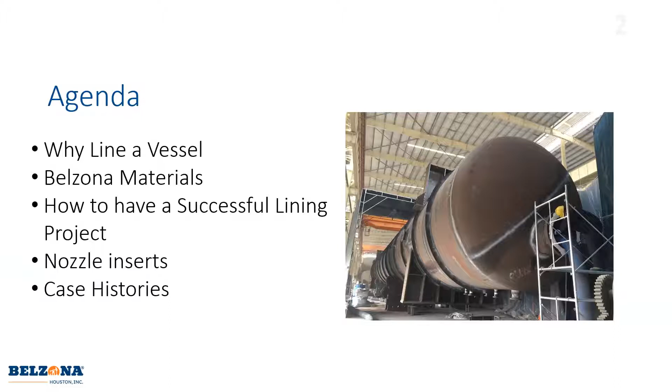Today, we're going to talk about pressure vessels. Mainly, we're going to concern ourselves with internal linings, as you see in this photo, so protecting the vessel from the inside. We're going to talk about why you would even line a vessel, which is a pretty standard practice nowadays. We're going to go into our Belzona materials, talk a lot about how to have a successful lining project, then go into some case histories and some cool stuff like nozzle inserts.

So why even line a vessel? Well, the main thing is you're increasing your reliability. You've significantly reduced the risk for corrosion of the asset, and with that, you've increased your life cycle. So maybe you had to do an inspection every 8 years or a turnaround every 10 years. Well, now you can extend that inspection every 15 years, and extend your turnaround every 20 years.

So you reduce a lot of downtime, and you also reduce the risk of severe corrosion happening and creating an emergency shutdown for repair. So a lot of reduced downtime, and that's huge because I know time is critical. Online time is critical, so you're having a lot of time savings, which is money savings.

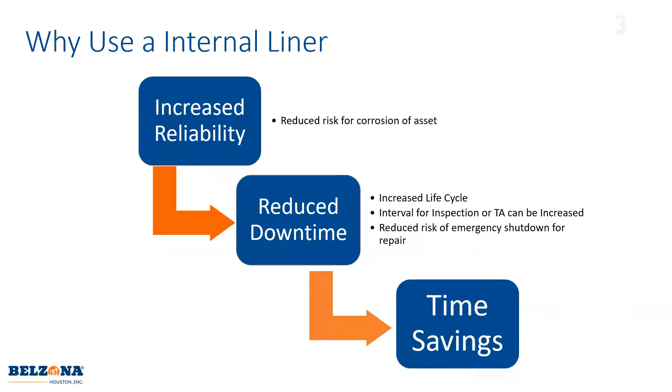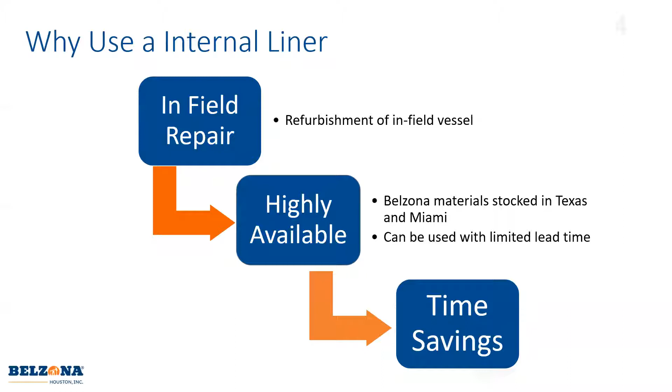As far as that's once you coat a vessel. Let's say you have an infield repair. You have a vessel, you do an inspection, and you realize we need to do some repairs here, we need to protect this vessel to get a longer run. Well, the Belzona materials, we have them stocked here in Alvin, ready to go, highly available. So if you needed to do a repair, out of the blue or during an inspection, we can be there with a very limited lead time and be ready to roll and get a repair as fast as possible, which could give you more time savings, less downtime for the repair.

Another big reason why a lot of asset owners use epoxy coatings or internal liners is they're a huge cost benefit over a typical change to an upgraded metallurgy, like a corrosion resistant alloy cladding. This is an example for one project where they had about 40 vessels and they were trying to decide between a Belzona liner or a corrosion resistant alloy cladding. As you can see in that top row, option 2 was the cladding, option 1 was the Belzona, and the Belzona was about a fourth of the price. So they saved quite $150 million on capital cost. That's a big time savings for a system that's going to give you that corrosion resistant protective layer.

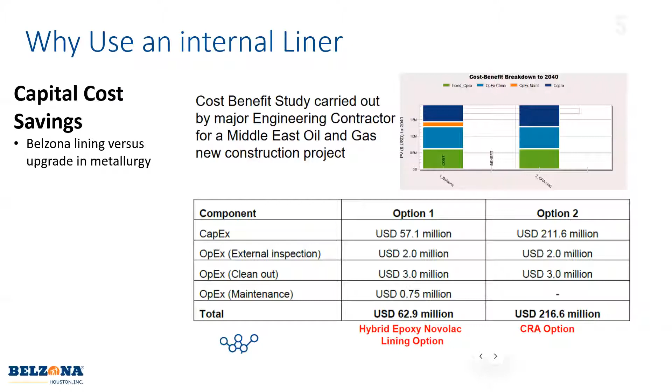So that's one of the big benefits, your capital cost savings. Down the line though, you're also getting simpler fabrication, simple maintenance, and they can still be inspected with an easy inspection strategy. As far as fabrication, a Belzona liner or any internal liner is going to be a lot easier than clad welding with a corrosion-resistant alloy. Also, since you're using a liner, you don't have to upgrade metallurgy to a stainless steel or an alloy. Your fabrication in terms of welding and machining is going to be easier with carbon.

As far as maintenance, if you're looking at an uncoated vessel versus a coated vessel, you're going to have a lot less maintenance over time. You're not going to have that metal loss over time. You're not going to have to stop production and do a quick repair. You're not going to have a through-wall defect over time because of extended corrosion.

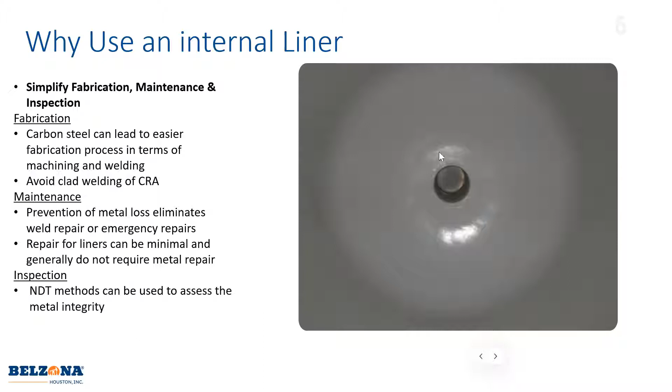This right here is an example of a coated vessel, and this is 5 years after. So what you've effectively done is installed a corrosion allowance system. Instead of adding more metal for your corrosion allowance, you put a liner. This is 5 years after, so you've effectively stopped 5 years of corrosion. Most of our liners, when they're fit for service, you're looking at a 10 to 15 year lifetime, and that doesn't mean after 10 to 15 years it's totally gone. That's just our recommended inspection interval.

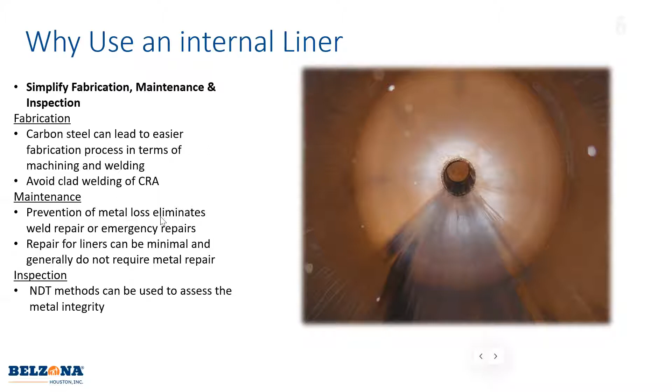As far as inspecting it during the service life, you can easily do a UT from the outside. If your metal is the same thickness as when the coating was installed, that should mean that the coating is protecting the metal and it's not corroding. So that's a good technique for inspecting the coating without actually opening up the vessel and doing a visual inspection.

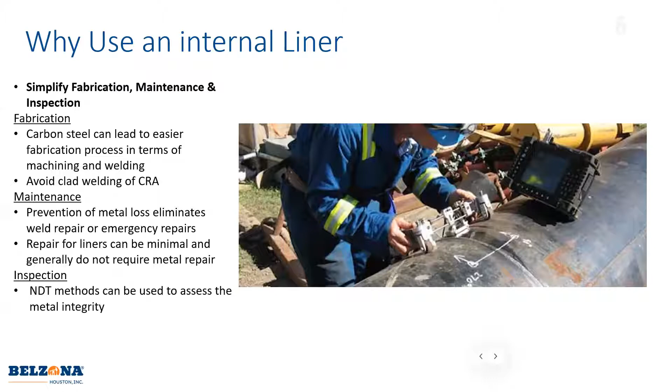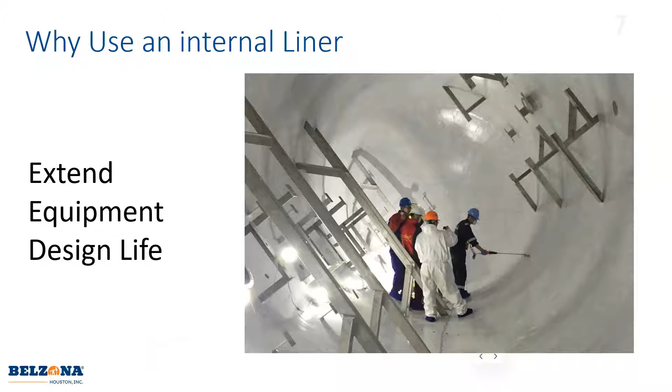And finally, the main thing you're looking at is when you coat a vessel, you're just extending the equipment's life. You're extending the life cycles. Anything you coat, you're just putting a barrier between your asset and the fluid on the inside. So just protecting your asset for a long run.

So going into the Belzona materials, how do we know that our coating is going to be fit for service? Well, when talking to a lot of oil and gas asset owners and petrochemical asset owners and having a conference, these are kind of the most important testing regimes that are out there for internal liners.

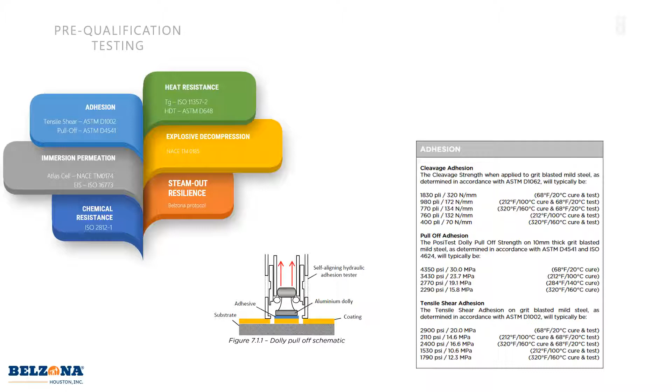So the first thing I'm going to talk about is adhesion. You definitely don't want the coating to delaminate over time, so you need a really strong adhesion. One of the things we do is adhesion testing at different temperatures. We do adhesion testing after chemical testing, after immersion testing. So you really got to know, yes, it has adhesion after it's cured and ambient, but how about at high temperatures? As you can see here, we do adhesion testing at higher temperatures, and you can see there is a fall off.

So you want to always make sure your coating has data in those temperature ranges. So how do you know what kind of temperature ranges they can handle? Well, one of the best tests out there is called the Atlas Cell Cold Wall Immersion Test.

As you can see on the left here, there's two different ways to do it. If you want it to be a little bit pressurized, you can use a flange system where you flange in. You have two flanges. The inside of the flange is coated with your liner, and then they fill up the pressure boundary with water at a certain temperature. The other one is kind of a glass cell. It's not really pressurized, but you can still get a temperature on it.

So then they run this test for about 6 months at a certain temperature that they think the coating should handle, and they test it periodically for delamination, blistering, all types of defects. For it to be suitable for that temperature, it has to go the entire 6 months without any defects. As you can see here, there is a change in color, but there's no cracking, no blisters, no delamination. So that's a pass there.

Once it passes the visual test, they'll actually check the coating for resistance. If it absorbed any water, then the resistance would go down, so it has to pass that test as well. And then they even do an adhesion test after this test, and it has to maintain its adhesion to show that it didn't get any mechanical damage from the heat or from the water.

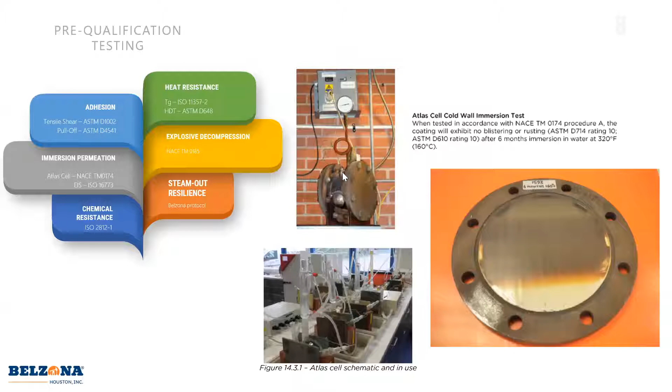Also, the biggest question - all these pressure vessels are going to have some sort of chemicals. Can we handle the chemicals? Well, we do year-long testing. We coat these rods and immerse them into a lot of different chemicals at different temperatures and concentrations. For them to have an excellent rating, they have to have no defects after 1 year.

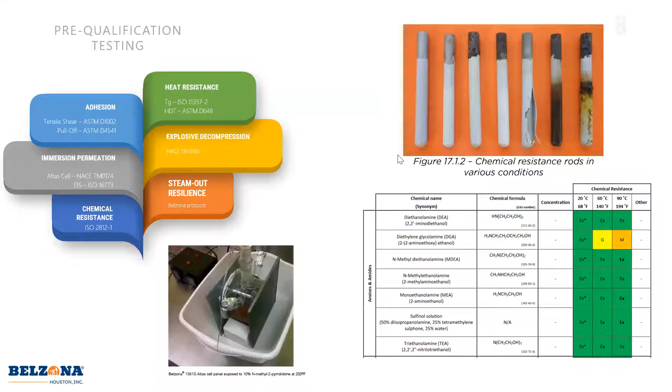Also, you want to make sure that temperature is not going to affect your coating. These are polymers, so when it reaches a certain temperature, you could get some loss in mechanical strength. That's what we call the HDT. Above the HDT, it will lose some mechanical properties such as stiffness and tensile strength. You want to make sure it maintains all that because the mechanical properties add to the adhesion. If it loses some mechanical properties, it will lose some adhesion, so you always want to test that as well.

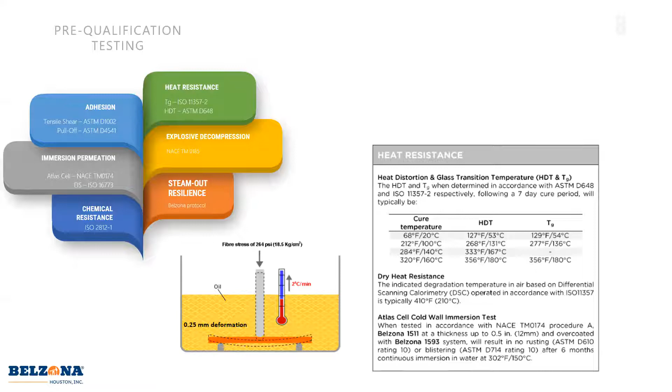And then finally, explosive decompression. This comes into play after your liner has been in service and you want to shut down for an inspection or a turnaround. You're going to depressurize your unit. One issue that could occur is if you depressurize at a certain rate and the coating can't handle it, it could have some issues as far as blistering.

Sometimes gases do permeate the coating, getting a little bit into it, and when they diffuse out, they can cause a blister. So we pressurize our coatings pretty high, to 100 bar and 212 degrees Fahrenheit, and then do a rapid decompression over 15 minutes down to atmospheric pressure, to make sure they don't have any issues.

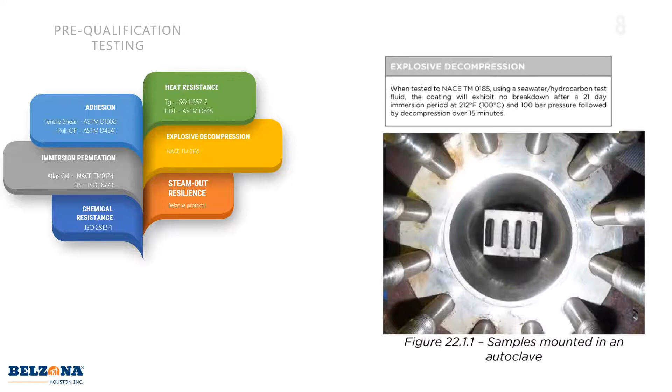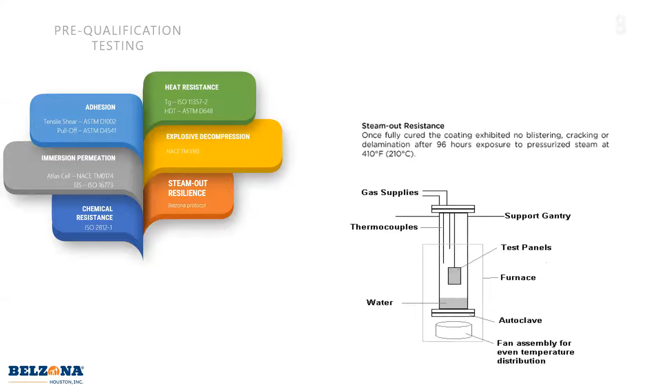We do this with a lot of gases, hydrocarbon gases, and seawater, just to make sure it can handle that. And we know that to inspect a coating after it's been in service, you have to put it through a cleaning and steam out regimen, so we do steam out testing to make sure it can handle that as well. We make sure it's going to handle the service and the cleaning, and then you can put it back in service once it's been inspected.

So now I'm going to go through a coating project. Phase one is typically where we work with our client, figure out what's running through the vessel, what's the temperature, what are the chemicals. We'll look at our testing, figure out what product we need to use, and then put together a specific project specification, an ITP, which is an inspection test plan.

We'll put together the hold points, who's going to inspect it, who's going to install it, are they trained? If not, we can train them. Is it going to be our guys going in there? We'll get all the data together, safety data sheets, CRS sheets, which are chemical resistance sheets, put it all together in a package, schedule it, and get it ready to go.

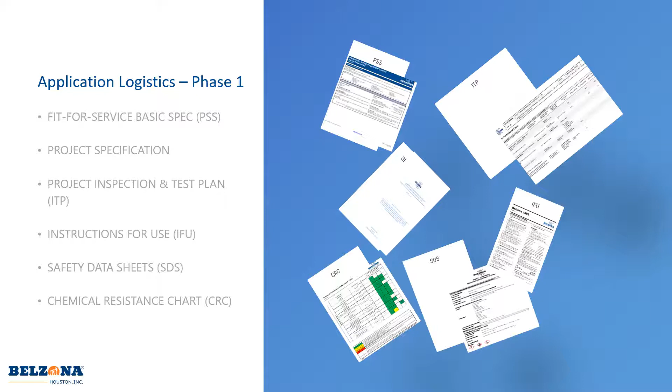Once it's approved, we can move on to phase 2, which is the setup prior to arrival. Scaffolding is a big thing. Sometimes you have vertical vessels and you need scaffolding, sometimes on the outside to access nozzles. So that's the main thing - every project usually needs some scaffolding.

Airflow - obviously we're working in confined spaces, so we need airflow. We need to know what size the manway is, so we know what kind of equipment we can put in there. Nozzles isolated, disconnected, and the vessel decontaminated.

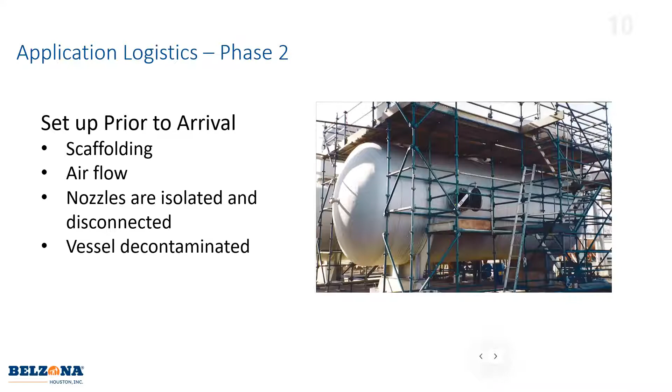Once all that's done, we can start our mobilization phase. A lot of these jobs in the field are done as new construction, so you can do them in a shop, which is a little different, a little easier - you don't have to deal with things like the shutdown process. But in the field, even in the shop, you need a climate control system, a DH and an AC, bringing dry air into your vessel. For all that, you will need a generator.

We need to blast the surfaces to get our profile and surface cleanliness requirements, so we need a compressor, blast pot, hoses, and our blast media. Then of course we need our Belzona materials, our Belzona product. Sometimes we apply this by airless spray, so we'll bring in our spray rig.

So there's a lot to set up. That's usually a day or two to get everything set up, get familiar with our pressure vessel, do an inspection, and get a plan to go ahead, because there are times when that's the first time you've seen the inside of this vessel. A lot of times when you're shutting it down in the field, you don't really have a chance to see it until you start your project.

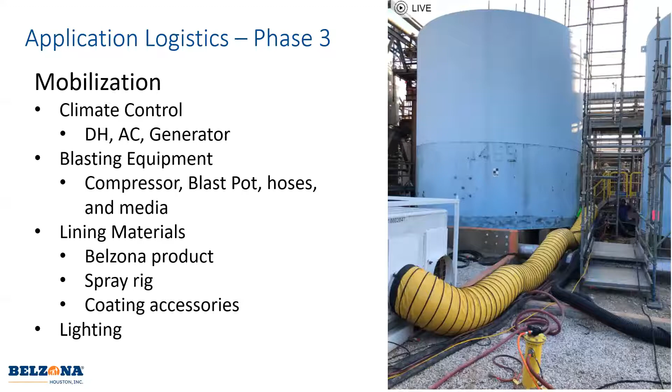So this is where the pre-surface preparation comes in handy. You can go in there, take a look at the vessel. Maybe you found there's more pitting than you thought, maybe there's less pitting than you thought. Look at all the welds, see what needs to be stripe coated, make a plan.

One of the main things of the pre-surface preparation is, even though the vessel's been decontaminated, steamed out, and cleaned out, sometimes you do have some salts within the metal, and one of the big things is you want to check that. That's what this picture shows - checking there's 16 milligrams per meter squared of chlorides. Our limit is 20, so we were good here.

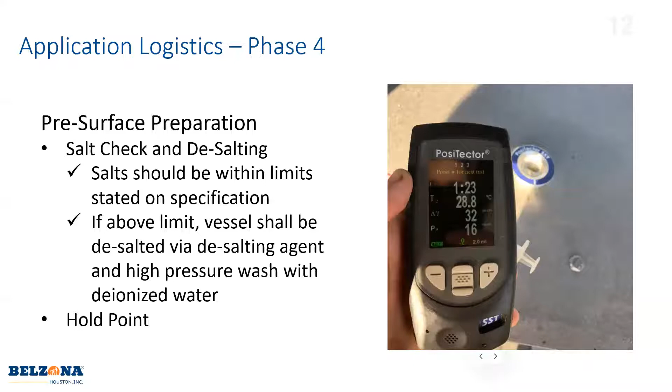You want to make sure you're under the limit, that way you can blast and not have to worry about any flash rust, and also any blistering during the application. If you do apply it with high salts, there is a chance for blistering over time. So if we do find that it's high, we'll desalt it before we start blasting, and that's usually a hold point with the inspector.

So we got our mobilization, we're set up, our vessel's decontaminated and desalted. This is really when the application process starts. This is when everything has to be done boom, boom. You don't want to wait too much in between steps.

So the first step is to get your surface preparation done. Any internal liner, we're going to need a blast to near white metal. That's a clean blast, removal of all rust scale and mill scale, down to bare metal with a 3 mil anchor profile. As you can see here, we're blasting.

This does end up in a lot of blast media being made. So one of the big things is you want to have a vac truck ready once you're done blasting to suck out all this media as quick as possible. Clean your vessel. This does bring a lot of dust out, so you have to do a solvent clean, vacuum. You want this metal to be pristine, just clean, no dust, no media, nobody sweating in there.

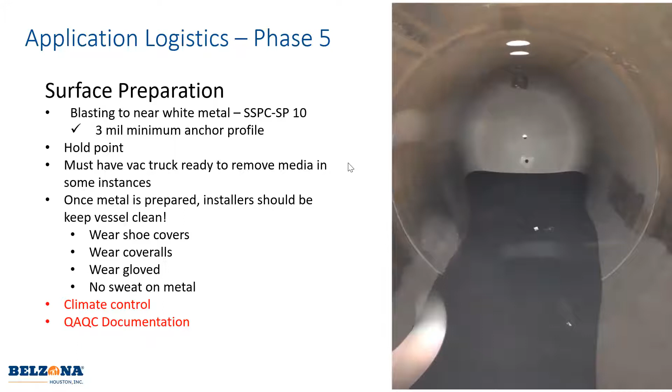So that's one of the big things we tell people is, once it's blasted, you're going to have a clean operation. Everyone's going to wear shoe covers, coveralls. One of the big reasons to have AC too is to keep it cool so people aren't sweating in there, because that could lead to flash rust. So it's really big to have climate control, QA, QC documentation throughout showing that it is climate controlled and you got your profile and you got your cleanliness. This is going to be a hold point after this.

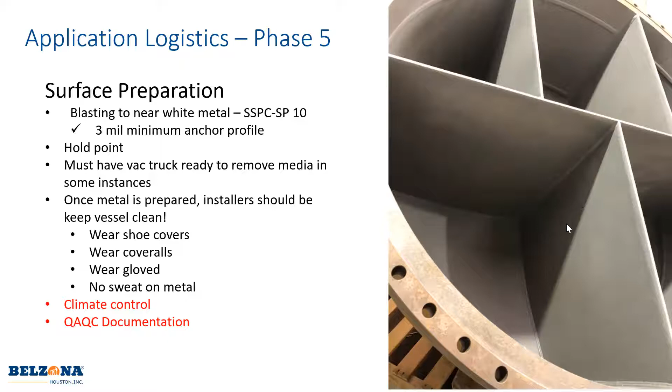So this is what a near white metal blast would look like. Clean metal with a rough anchor profile. That's going to give us our best adhesion.

So once you've done the desalting and the surface preparation, you have it blasted and you have that vessel cleaned out, that's a good level reached there. That's always kind of, now it starts to flow pretty good. No more heavy lifting. Now it's just, let's coat it.

So the first thing you usually do is, if there's any pitting, you're going to pit fill with our rebuild products. There's nozzle inserts and there's stripe coating. Normally those are all done at the same time. You have a 3-man crew, 4-man crew, you kind of attack those all in one day.

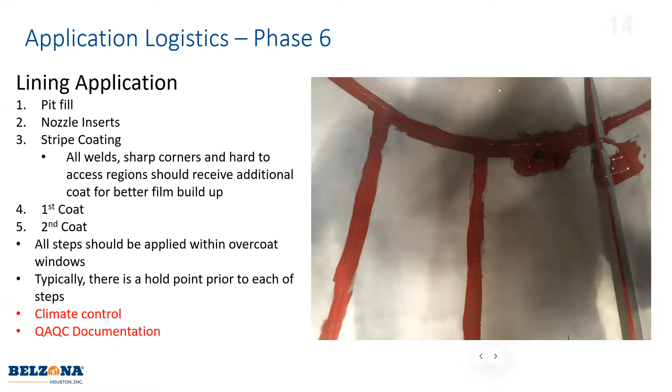So stripe coating is what you're looking at here. That's an additional coat to any hard to reach areas, any welds and sharp corners. Sharp corners and welds tend to need a little bit more film buildup to avoid having pinholes. So those areas would require an extra coat. Pit filling, if you have any pitting, you want to smooth it over with our rebuild paste grade materials. Then any nozzles, there's always a lot of nozzles on the pressure vessels.

Any nozzles 3 inches or below OD, it's really hard to coat those properly. You can stick a blast nozzle in there and coat it as best effort. But the only way to really get 100% coverage guaranteed is with our nozzle insert system.

Nozzles are an area that tend to be the failure points. So this is a system that increases the reliability tremendously.

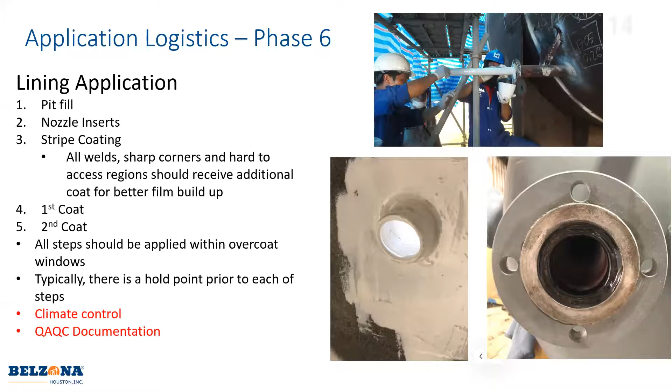So once you've done your pit fill, your nozzle inserts, and your stripe coating, keep in mind that you have a blasted vessel. You want to do this in a timely manner, and get your first coat on as soon as possible, because that freshly blasted surface has a limited time before it would flash rust, especially in the field and especially a vessel that's been in service. So you want to get all this done, and as soon as it's tacked up and ready to go, you want to get your first coat on.

So this would be our first coat. Now, once you put on your first coat, you kind of breathe easier a little bit, just because you've applied your first coat on a nice blasted surface, and you don't have to worry about flash rust at this point or having to do an extra blast.

So this is when you can kind of breathe easy for a second, but you also got to keep in mind that every coating has an overcoat window. So for example, this one has a 24-hour overcoat window.

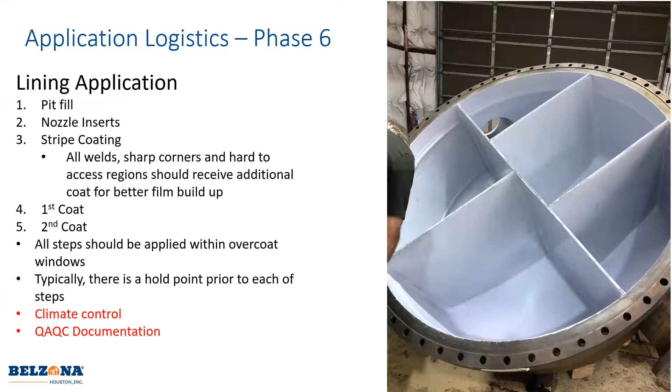So I have 24 hours before I need to put the second coat on, and it takes about 4 to 6 hours to dry. So you really want to time it later in the day, so that the next morning you can come in and get that second coat on. That's what we typically do: get our blast done early, stripe coat, and then later in the day apply our first coat.

And then in the morning, the second coat. So you just got to plan that out, because a lot of times you have to walk on that first coat, so it has to be dry enough for you to walk on, not like this scenario where you don't really have to walk on it.

And so all steps should be applied within the overcoat window. And typically for each one of these steps, there's a hold point. So that's another thing to keep in mind: keep your inspector in the loop.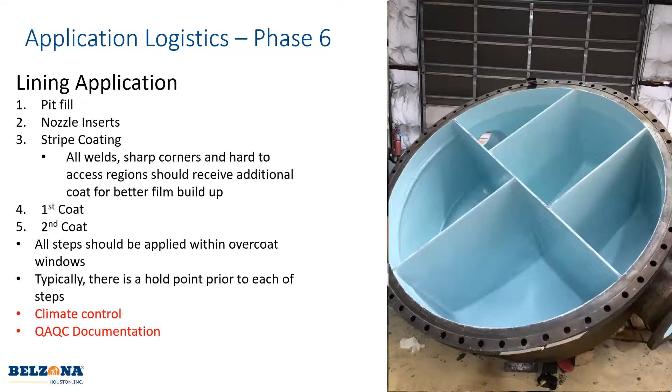Tell them, hey, we're about to stripe coat, we're going to be done in 30 minutes, so you can come and look at it. Hey, our stripe coat's set up, everything's ready for the first coat, because you can have some time in between, and time is just very precious during these applications. Finally, once you have your 2 coats on, that's when you can almost breathe a little easier.

But that's when the fun part comes, which is the inspection. So with internal liners, it's a very particular process. I mean, they really have to be perfect. So you literally check every square foot for pinholes with this holiday detector that you're looking at here.

So you drag it along the surface, and if there's any pinholes, it'll make a spark or a beep. So you have to check for all those and mark them. There's always going to be a couple here and there. And then you also...

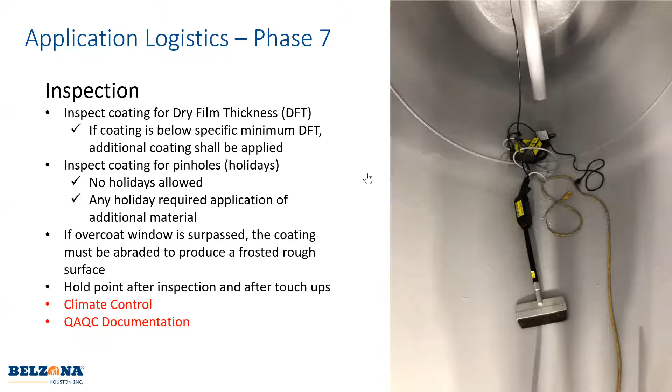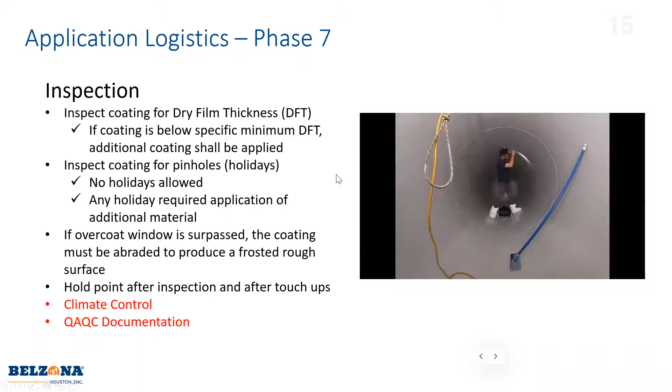So right here, I'm checking for the dry film thickness. So every coating has a specific thickness that you have to reach, so you have to make sure that you're within that thickness. If you're below the thickness, you have to mark that spot and add additional coating. If you're above that maximum thickness, then you have to sand it down and get it below the maximum thickness.

So pretty much you have to have a perfect liner for every system. That's what gives it the increased reliability, is that the QA/QC process during the application is what gives you that increased reliability.

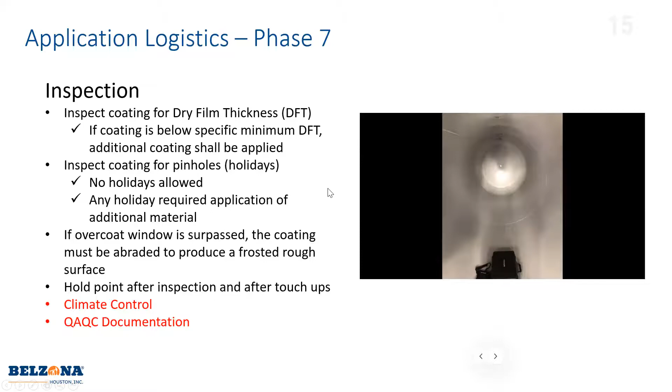And finally, you do it all right. We always tell our clients, just make sure it's cured. I mean, there's no point of going through that whole process and putting it into service too soon.

There are ways to make it cure faster via force cure. So for some application we had last year, we put in 150-degree heat with a heater, and we decreased the cure time by almost half. As you can see in this completion of the molecular reaction, you can significantly make your coating cure faster with some added heat.

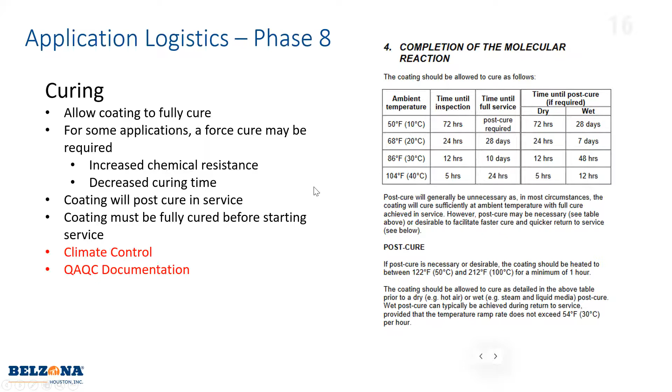So going into some examples, we do a lot of different pressure vessels, a lot of hydrocarbons. So this is a high pressure, low pressure separator, knockout drums for offshore. Temperature range from about 150 to 200 F, and the operating pressure from about 150 to 600 PSI. Like I said, it's just a hydrocarbon and water mixture.

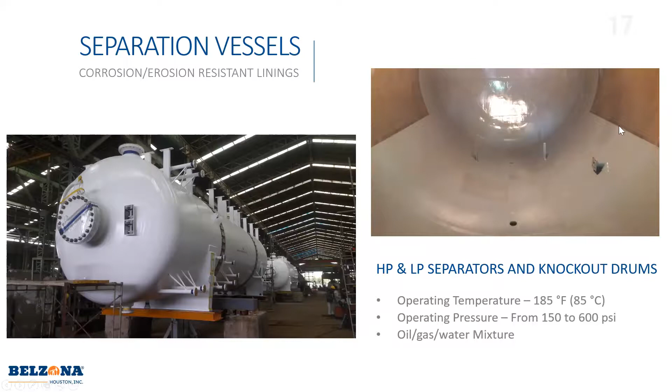For a lot of these vessels, they typically coat the bottom, kind of like for desalters and water separators. The water tends to settle on the bottom, so that's where most of the corrosion occurs. So you don't always have to coat the whole vessel. You're not going to have any corrosion at the edges. It can handle itself and protect the areas that need to be protected. Kind of same idea here, just the bottom of an electrostatic desalter. So fairly large vessel here.

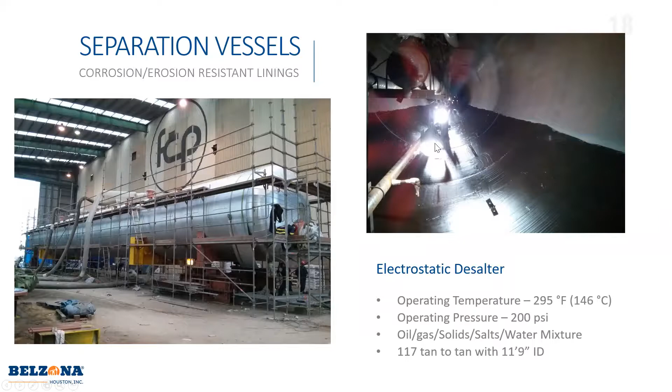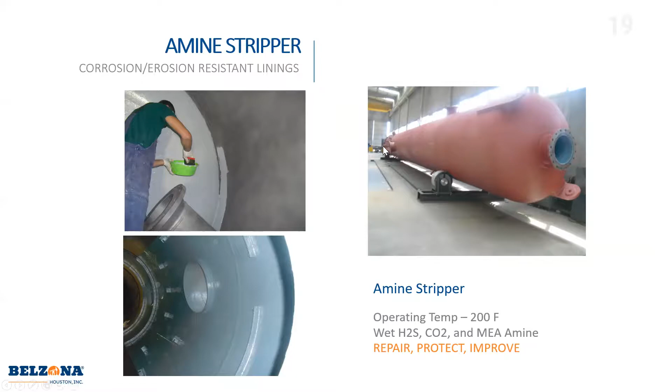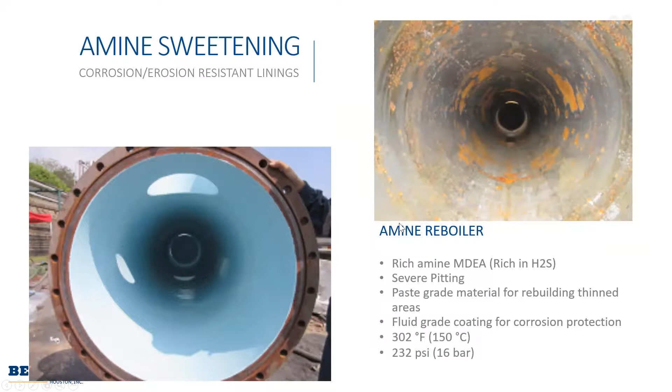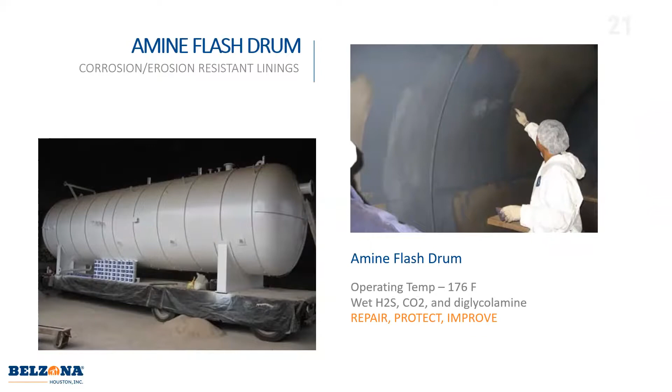There's always times when your generator might go down, or your AC stops working for some reason. So you want to have operators check throughout the night and make sure that AC is still on. That's happened to us before - you come to the field the next day, your AC shut off midday, so you lost your climate control. So you want to keep track of what's going on overnight.

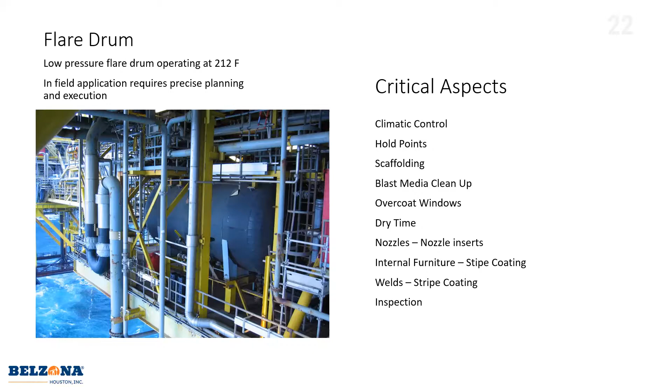Blast media cleanup is a little tougher, especially you want to get everything timed with the vac trucks and make sure you clean up that blast media as soon as you can. And then just scheduling - sometimes for shop jobs, we can have a day crew and a night crew, which makes it a little faster and makes it a little less close to overcoat windows, but it's tougher to do that in the field. So just want to keep in mind when you're working in the field, things that you have to deal with.

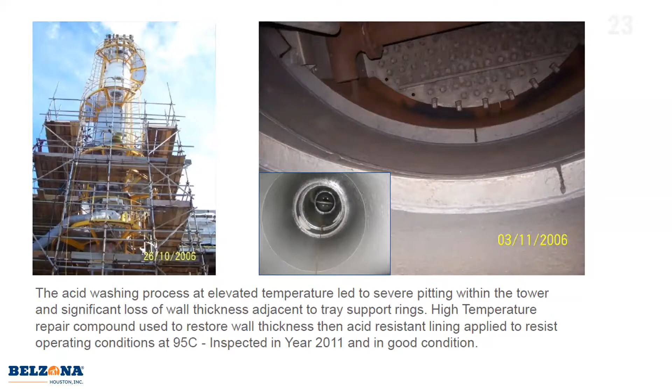And we've also done - it's not always coating every part of the vessel. For this one, it was a couple of trays having issues underneath. About a 10-foot section in height was suffering the most, so we coated that section.

This one was just the bottom half having issues. So we coated the bottom half.

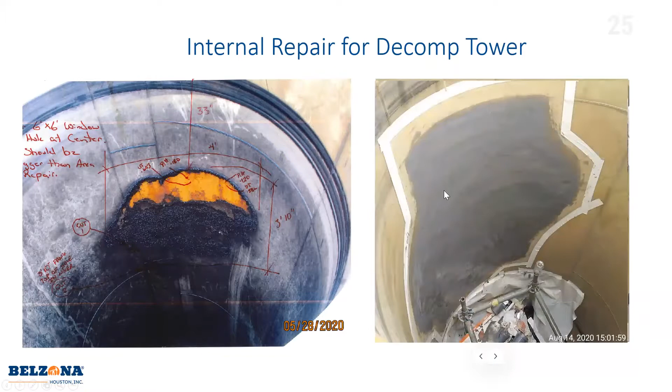This is a particular one here. They actually had a Halar coating with a rubber liner underneath, and it was burned during the upset. So this is one that's more like a repair - we came in and just did a localized repair. This rubber liner was about a 1/4 inch thick, so we used our paste grade material to make it flush with the Halar coating. That's what they requested. And then we apply 2 coats of a system that can handle what was running through the pressure vessel.

And all you're doing here is protecting your vessel, isolating it from the fluid, and giving yourself some extended life. So you might have hit a corrosion spot where you're not going to make it to that 2023 turnaround, but if we coat it, we can easily make it there and probably go past it. So that's the main idea.

A lot of clients just choose to, on new construction, coat it, and that's going to really extend the life. You're never going to see that corrosion, and you're just protecting your asset from the start. But we can also rebuild it once it's seen that corrosion.

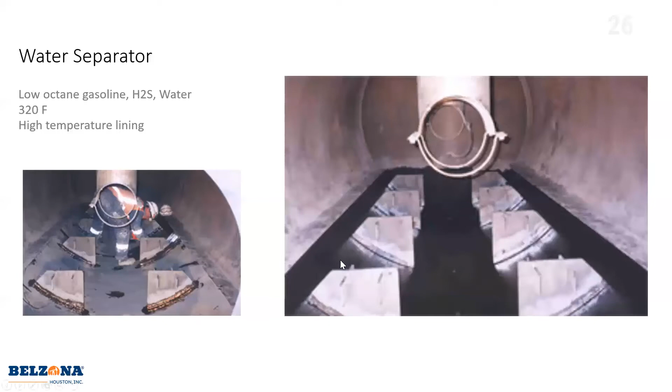So that's about it for this presentation. We definitely do a lot more with pressure vessels. Some of the problems we've been seeing more than internal corrosion is actually CUI and external corrosion, so we definitely have a lot of solutions for that as well. That will be another week - we've talked about CUI and we've done external corrosion.